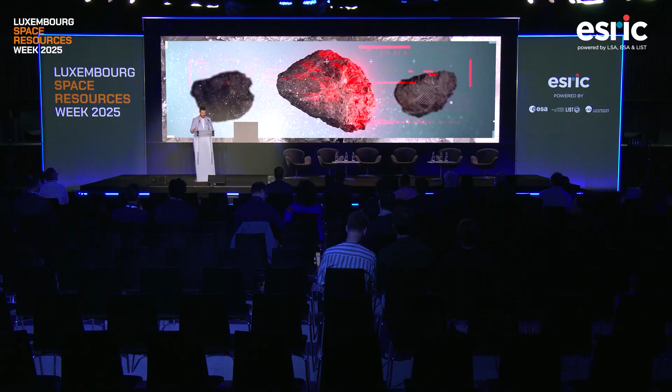Hello, good morning everyone. Thanks for making it that early in the morning. So I'm Timon Schild. I'm a PhD candidate here in Luxembourg at Esric, and I'm going to talk a bit about our work on the FFC molten salt electrolysis process, and specifically on the metal production aspect of this process.

So for a bit of context, some of you may be familiar with this. This is a diagram of the FFC process, which is used to extract oxygen from lunar regolith, or in our case, lunar regolith simulant. And as a byproduct, you also get all the metals that were present in your feedstock collected at the cathode.

What our project is looking at is taking those metallic byproducts and turning them into a feedstock that we could use for additive manufacturing. So in this talk, I'm going to talk about, first of all, the characteristics of this product, the investigations we did to look into the melting behavior of those for the casting and forming of those alloys, and finally a little sneak peek into some early results on laser interaction.

So to begin with, I'm going to do a very quick summary of my presentation from last year, which was all about the characterization of those materials. So what we did, we ran the FFC process at a lab scale on LHS1 regolith simulant. And when you do this, so you electrolyze it in calcium chloride, in our case for 24 hours, you end up with this kind of material.

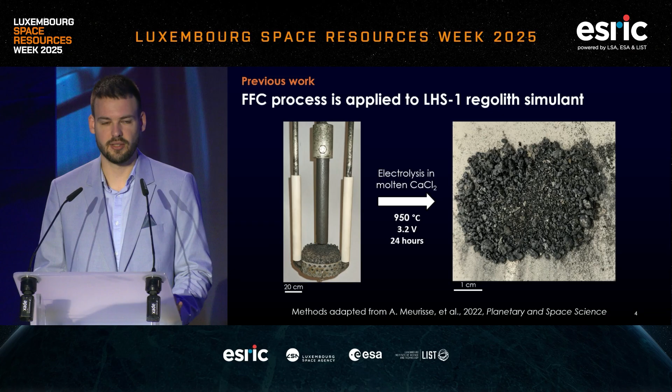A metallic powder or granulate that looks very heterogeneous as it is, and even more so if you take it under the microscope. So here you can see the abundance of all the different metallic phases that you have in there, all mixed together. I'm not going to go too much into details about that. We have a publication that came out earlier this year. I invite you to have a look at it, and afterwards I'm happy to discuss some parts of that.

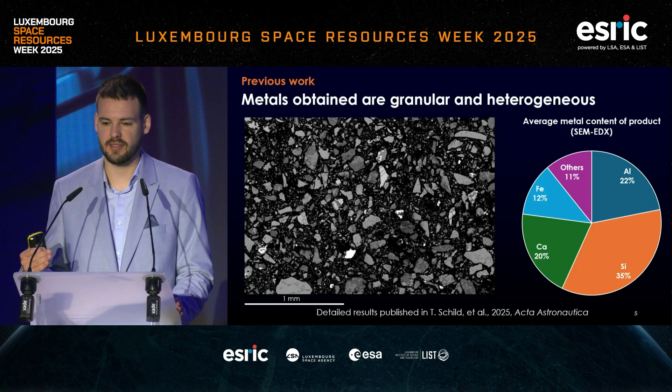The only thing I'm going to tell is the average bulk composition we observed in this material is, as you expect, most of the metals you put in come out. So you get mostly aluminum, silicon, calcium, and iron, as well as some contaminants from the process. So now I'm going to talk about what we've been doing during this current year. We have been looking at the thermal post-processing of this material and how we can turn it into an ingot or a billet that can be used for manufacturing.

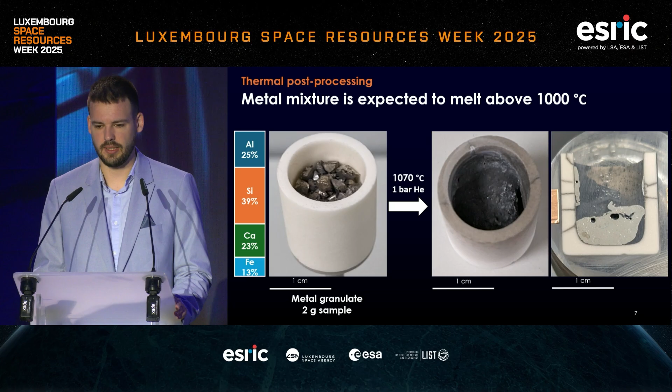So the first thing we did is we took off-the-shelf metal granulates and mixed them in the proportions that we observed in our product. So a mixture of aluminum, silicon, calcium, and iron, and applied different temperatures to it. And we observed that slightly above 1000 degrees C, when we heat it under inert atmosphere, we were able to produce this nicely molten ingot. Here you have a cross-section of it as well.

And when we look at it under SEM, we see isotropic distribution of metallic phases, no clear, let's say, vertical phase separation, and you also see complete consolidation. So it forms a nice melt pool and consolidates to a solid ingot. This is nice.

This is kind of what we were looking for to get from our products out of the FFC process, but when you apply similar post-processing to actual products coming out of the FFC process, things get a bit more complicated. Here, just for the composition, again, not many changes. We get out what we put in, so we don't have many losses. We do have a slight decrease in calcium, but that's also within the measurement margins.

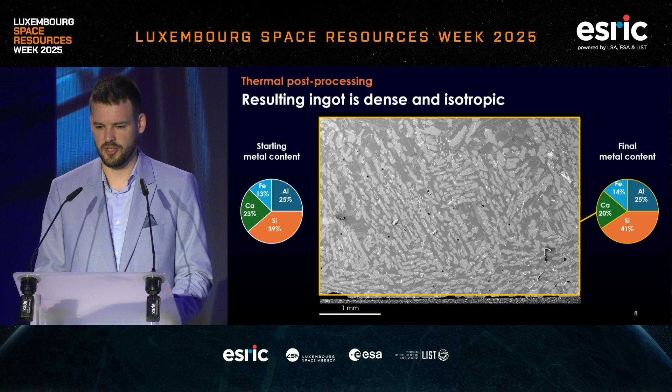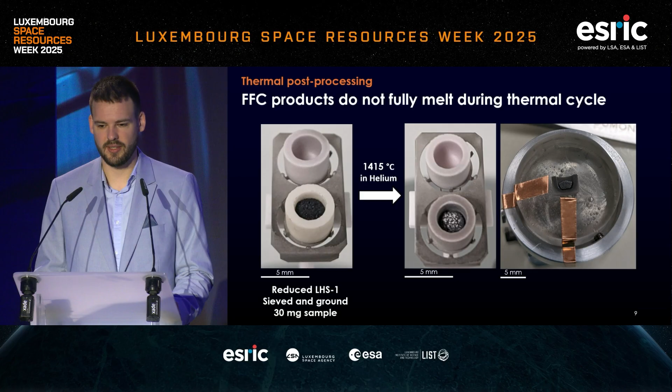So as I said, if we apply this to actual products that come out of the FFC process, here we took some reduced LHS1 and also applied different temperature profiles, but there we observed that even if you go all the way up to 1,415 degrees C, which is kind of the limit of our instrument, we do get consolidation, but what we can see is that we get more of a semi-molten, sintered ingot rather than nicely consolidated billet.

This is what it looks like under SEM. A few interesting features we can see there. First of all, we can see it's still quite porous, although it has partially molten in some places. And we can also see a vertical segregation. So we see a separate phase collecting at the bottom of the crucible there.

Compositionally, again on the left you have the starting composition that we measured in the material. A few interesting things in the bulk material in the red region: we see a significant decrease in calcium, which on one hand is explained by the pooling of a very calcium-rich phase at the bottom, but at the temperatures that I'm discussing here, we also expect some significant evaporation of the calcium. I'm not going to discuss the lower temperatures that we tried, but in a nutshell, the lower you go in temperature, the less and less it is consolidated.

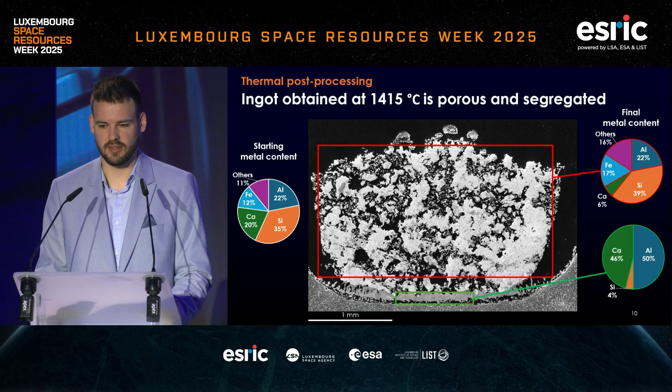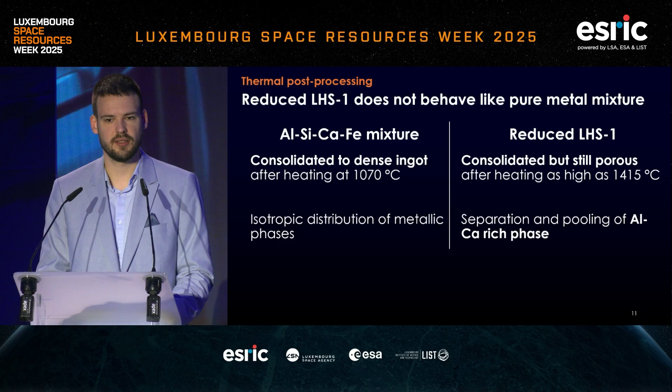So to summarize this part of the work, on the left we have the results with a kind of idealized mixture of aluminium, silicon, calcium, and iron, and on the right what we actually observed with reduced LHS1. We can see on one side we get, as expected, a nice melting and ingot formation, slightly above 1,000 degrees C, whereas with actual products from the FFC process, the consolidation happens, but not fully, and we don't have a nice melt pool formation, even as high as 1,400 degrees. We also observe a phase separation that we do not expect from the idealized mixture, where the phase distribution is isotropic.

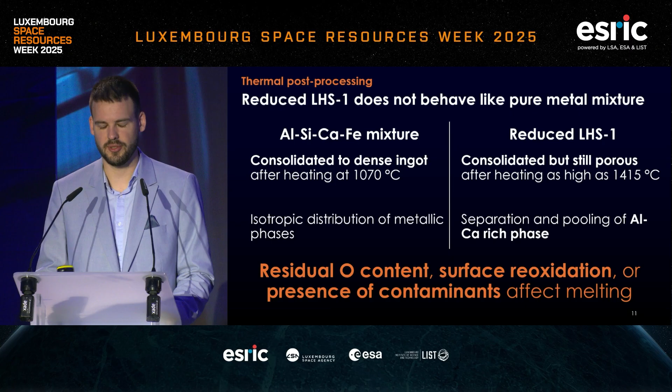So to conclude on that part of the talk, we expect that we have some elements present in the reduced regolith simulant that prevent the melting. Our main suspects, let's say, are the residual oxygen content. We still have over 1% oxygen in there, so 1 to 4 weight %. It could also be surface reoxidation during the post-processing, as well as the presence of different contaminants. I'm thinking stainless steel components from the reactor. So still some investigation to do there, but we still continued pushing forward in parallel, and we started looking at the end application, the additive manufacturing.

So here I'm going to talk a bit about Metal 3D, which is an additive manufacturing system built by Airbus Defence and Space, and that is currently on the ISS, 3D printing metallic parts. The way this process works, it's a wire laser-based process. So you have a substrate, in the flight model a stainless steel substrate, on which you impinge a laser beam that forms a melt pool, and then you feed some wire, in the flight model stainless steel wire, into it to form the parts that you can see here on the left.

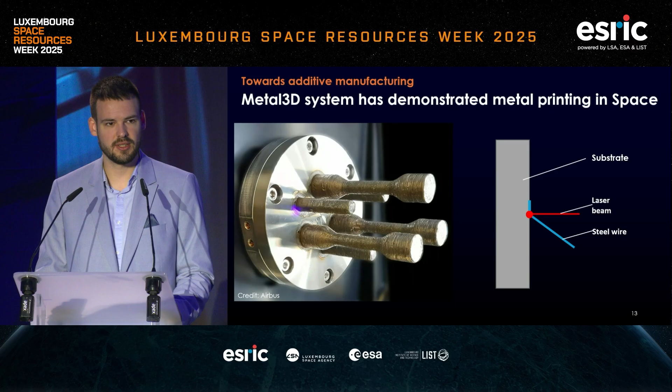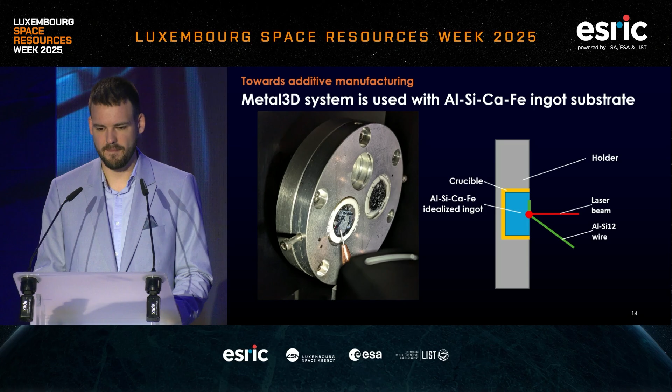So we have been using the engineering model, or a prototype of the same system, and we applied it to our idealized aluminum, silicon, calcium, iron mixtures. So we replaced the substrate by an ingot of our mixture, and we replaced the wire by an aluminum silicon wire, a commercial 12% silicon aluminum alloy. And so here I'm going to show the very early results from that. And I have a video of what this deposition process looks like.

So here we can see we're forming a melt pool and then slowly feeding the wire in it, and here it's just a first layer. The main thing to observe here is we get a very nice melting of the substrate and a very nice weld bead, in a way, deposited on it. If we look at the kind of samples we obtained, again, that's the first sample we got, so obviously there's room for improvement.

So on the left side of the sample, you can see single beads deposited. And then on the right-hand side, we tried stacking 2 layers on top of it. If we look at the section of this under SEM, that's what it looks like. And we can see 3 distinct regions. On the bottom, you have the substrate, which is very similar to the ingot I showed earlier.

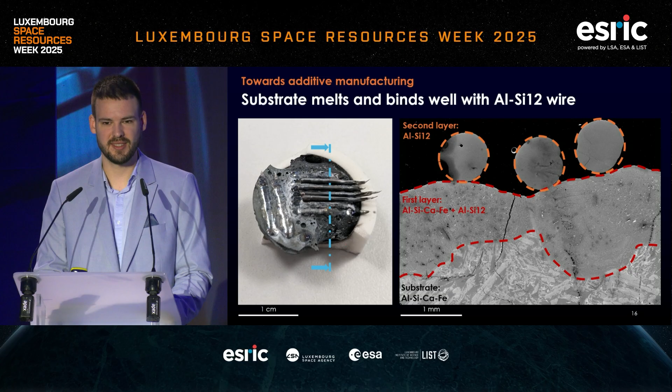And then the interesting part is the first layer is very well mixed between the aluminum alloy and the substrate with very good adherence and kind of mixing of the material. And when you look at the second layer, we can actually see that the metal wire we're depositing adheres less well to itself than it adheres to the substrate. So that's quite an interesting result for us, showing that the material does have potential for additive manufacturing.

So the 2 conclusions I'm taking from this work: first of all, the melting behavior of the metals that come directly out of the FFC process is not trivial and still needs some work. Our suspects, as I said, are residual oxygen content or contaminants from the process. But if we can solve this step, the metal ingots we are expecting to get at the end of this work actually should be quite suited to the wire laser-based additive manufacturing process, especially if we get a very nice melting behavior. I'm going to leave it with that.

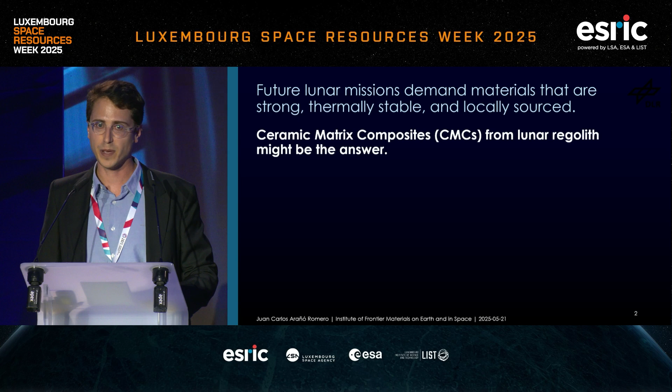So this talk covers five key points: why lunar regolith is relevant, what CMCs are, how we produce them, what we found, and then what this means for space exploration. So let's start with why lunar regolith could be such a promising material.

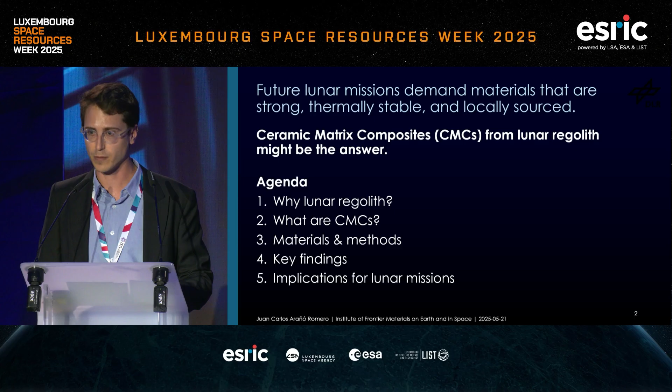So lunar regolith is rich in useful oxides, and they're readily available, so it's perfect for in situ resource utilization. And this table here compares the oxide composition of actual lunar samples with our raw material used during these experiments, the EAC-1. As you can see, it contains silicon oxide, aluminum oxide, and iron oxides in a comparable range, specifically closer to mare regolith.

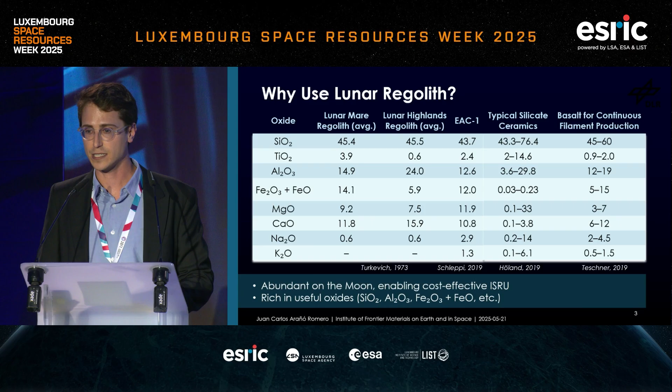And now we can see that typical silicate ceramics are also in a comparable range, the typical oxide composition, as well as the typical chemical composition for basalt used for continuous filament production here on Earth. So this makes lunar regolith suitable for producing the materials that we require for the CMC production, as well as its ready availability. So let's talk about what CMCs are and why they matter.

So CMCs are an advanced material designed to overcome the natural brittleness of ceramics. It's a combination of a ceramic matrix with a reinforcement phase. In the case of this study, I will talk about short fibers. So by adding fibers, we are using the reinforcement strategy of improving the crack resistance of the ceramic.

And this means that the material will be more efficient because we can produce components that require less mass, but have a comparable toughness and the same performance as another component with higher mass. So because of these properties, CMCs are usually used on Earth in demanding environments, especially for thermal protection, structural panels, and components that usually face extreme temperatures and loads.

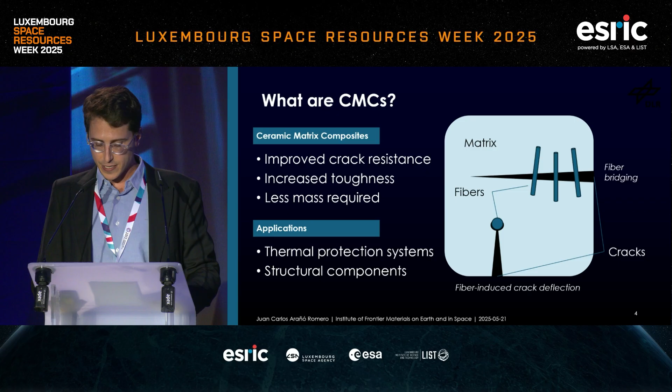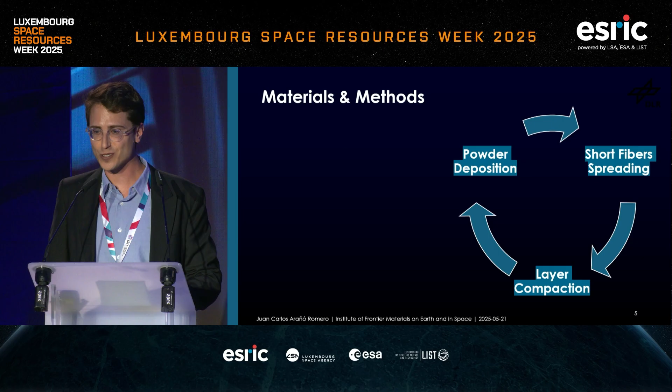So in our case, we wanted to make such composites. So let's take a look at our methods and materials. Okay. So as we already explained, our material is made of lunar regolith simulant, EAC, as well as short basaltic glass fibers that have been made from the same material.

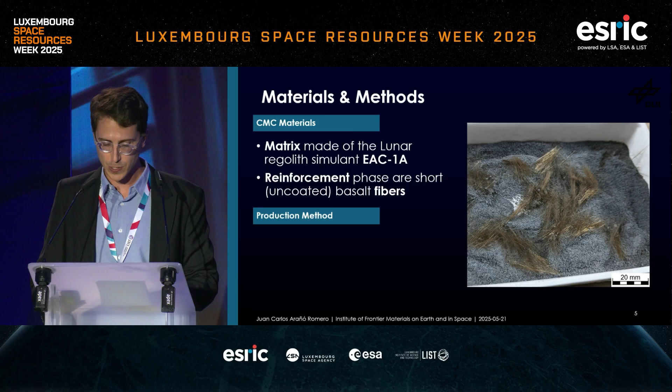So the diagram basically summarizes the process: we layer the powder, which was previously dried. Then we spread the fibers randomly over the powder layer, as I mentioned, and we compact each of the layers. Then we sinter the whole structure under different conditions, and with this setup, we produce multiple samples. So let's take a look at how they perform.

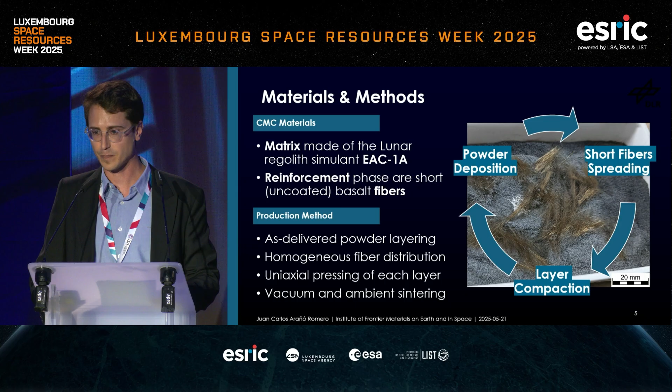So the mechanical results of our sintered samples will be described, and how the fiber reinforcements improve them. So first, with fibers, we saw improved performance. The samples tolerated more strain and reached a higher strength in comparison with the samples without fiber reinforcement. Interestingly, the holding time during the sintering, the thermal treatment, didn't have much effect on the performance across different particle sizes.

But higher sintering temperature clearly led to an improvement of the compressive strength, which could be due to the higher liquid phase. And there was also a significant strength gap depending on the particle size. Logically, as could be expected, finer particles gave better results because there was a higher surface area, and the particles could bond better. And we also examined the raw material under the microscope, and we saw that it actually has a smoother surface than real regolith, and that actually helps the densification of the sample during sintering.

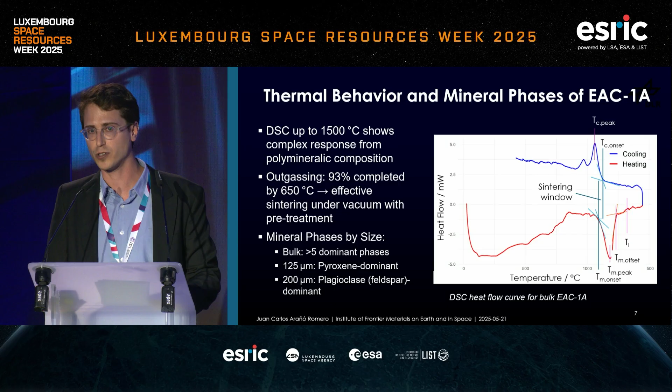Also, we ran some XRD, X-ray diffraction, in order to see the mineral phases in different particle fractions, and we saw that the bulk material has 5 dominant phases, but the finer fractions have mostly pyroxene and plagioclase. So this thermal result supports our mechanical findings, and we can show the potential for processing this material under space conditions.

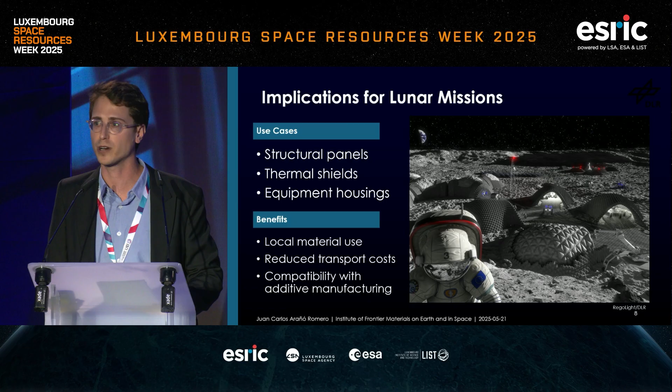So I don't have much time, so I'm just going to go really fast on the implications for the lunar missions. So basically, we are able to produce structural panels, as I discussed, thermal shields, as well as equipment housings for future lunar settlements. And the benefits are quite clear, that we can use the local material, we can reduce the transport costs, which will make it more economically viable, and it has compatibility with additive manufacturing, which is a project that we are currently working on, which is quite exciting, but we're not going to discuss it today. But you can ask me afterwards, of course.

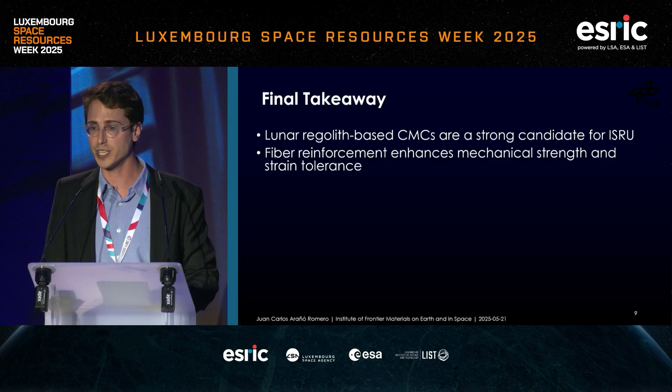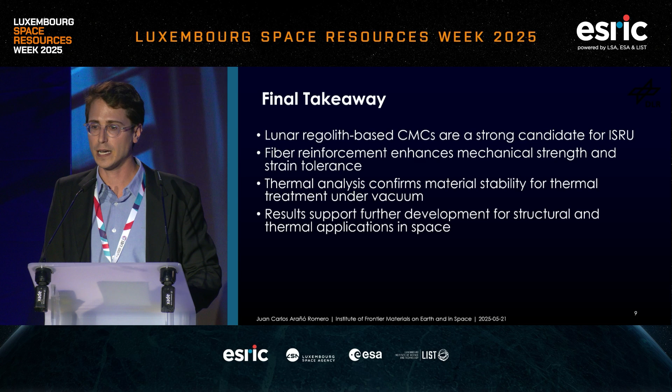And the final takeaways: the lunar regolith-based CMCs are working, fiber reinforcement actually works. So it improves the mechanical strength and the strain tolerance, and thermal analysis confirms some of the behavior of the material and gives a better understanding under vacuum. And yeah, these results support that we should further develop these technologies for future applications in space and on the moon. So thank you very much.

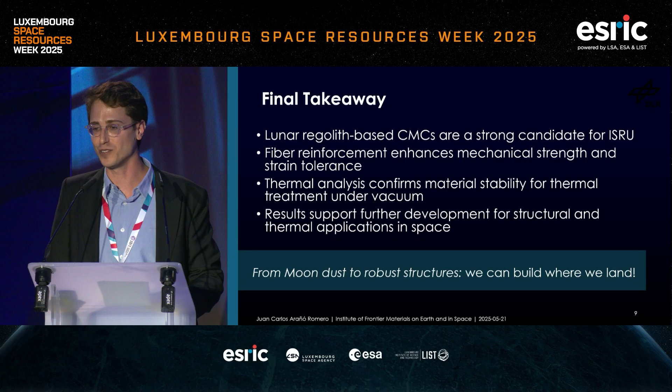I hope that we just wanted to say that we actually can build where we land, and moon dust is actually one of the materials to use. So thank you very much.

Thank you very much, Juan Carlos. I'm glad that you're talking about landing pads. I think Jerry's presentation showed that it was somewhat down on the list, but at least to me, that's an important aspect. So Jerry, first question.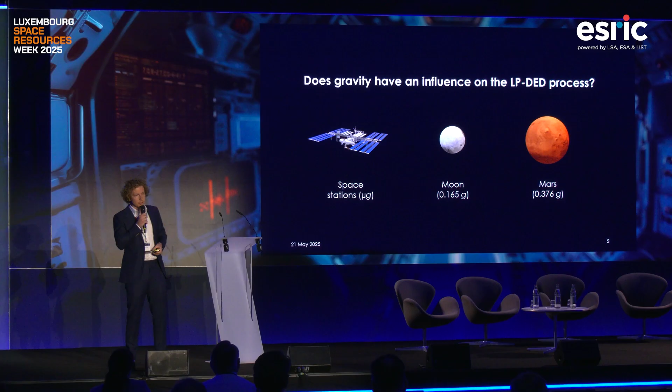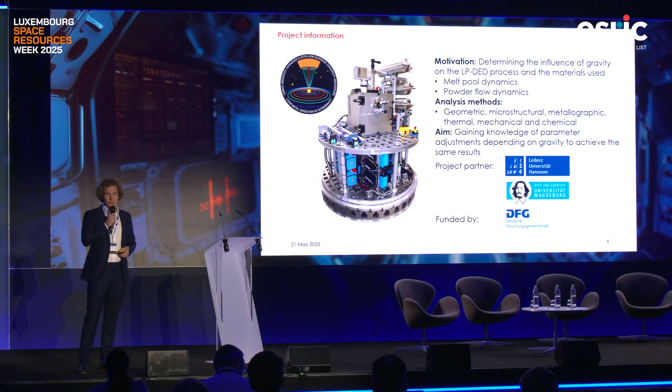So we're coming to the main question of my talk. Does gravity have an influence on laser powder directed energy deposition? For example, microgravity on space stations or lunar and Martian gravity. And that's the aim of our research project: determining the influence of gravity on the LPDED process and the materials used, especially the melt pool dynamics and powder flow dynamics. This project is a cooperation between the Leibniz University of Hannover, where I'm coming from, and the Otto von Guericke University of Magdeburg, and is funded by the DFG.

So how is microgravity simulated? That's important because we want to get to know the influence of gravity, so we're doing that at our drop tower facility located in Hannover, which is also part of the research infrastructure of the university. It's an active drop tower facility with a height of 40 meters, with a drive system over the whole length. There we have the opportunity to do everything between microgravity and up to 5G. For microgravity flights, we have a maximum of 4 seconds of microgravity with a residual acceleration of 10 to the power of -6 G.

And with the help of the drive system, we are able to do up to 300 flights in 24 hours. And we have a huge payload capacity with a carrier dimension of up to 1.7 meters in diameter and 2 meters in height and up to 1,000 kilograms. And we do offer third-party use, so if you are interested, feel free to contact us.

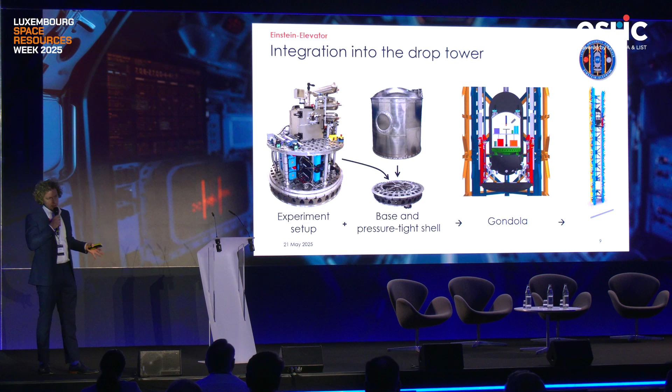That's the preparation. The experimental setup goes on top of our base structure, where several units are in, like the flight computer, heat exchanger systems, battery, and so on. Then we are able to put on a pressure-tight shell for acoustic decoupling, additional to the mechanical decoupling. Then the whole system goes into the gondola system, which you can see on the third picture, and then we are ready for flight. And that's how it looks.

So we accelerate the gondola with 5G for half a second, for the first 5 meters. And then the inner part, where the experiment is set up, will decouple from the bottom of the gondola, and we are in free flight. 2 seconds to the highest position, then it's falling again 2 seconds, so in sum 4 seconds of microgravity. And that's a small example, a bottle filled with water and a small amount of air. In microgravity, the air is forming a perfectly formed sphere.

So, in my case, the clicker is not working. Come on.

Okay, so how are the specimens manufactured in microgravity? This is a setup you have already seen with several units, like the control system. We have a cooling system for cooling down the laser system, the fiber, the nozzle, and the optics. And then a diode laser with a maximum power of 2000 watt. The diode laser has its own energy storage.

We have a manipulator on board so we do not have to open the process chamber and the gondola every time we have manufactured a specimen. Then the process chamber for not contaminating the environment and for having a shielding gas atmosphere, a powder conveyor, and the pneumatic system, which is part of the powder conveyor.

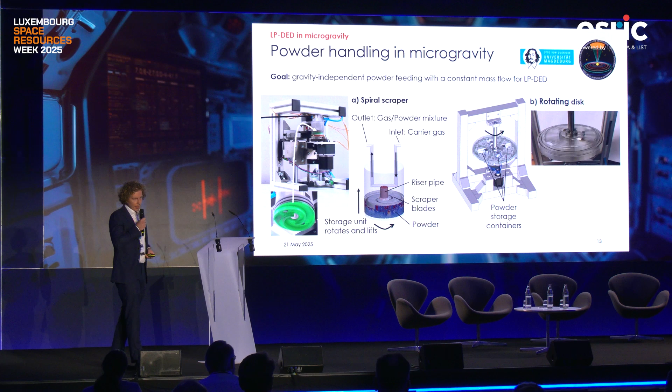And the second prototype is a rotating disc, where we are having up to 4 powder containers. And then we are rotating the disc. The particles are going to the outer part. We have again some argon tubes catching the powder. The mixture is going back into the center and to the outlet. And that's how it looks if we are rotating this. We are using the spiral scraper for our first flight campaign. And that's how it looks.

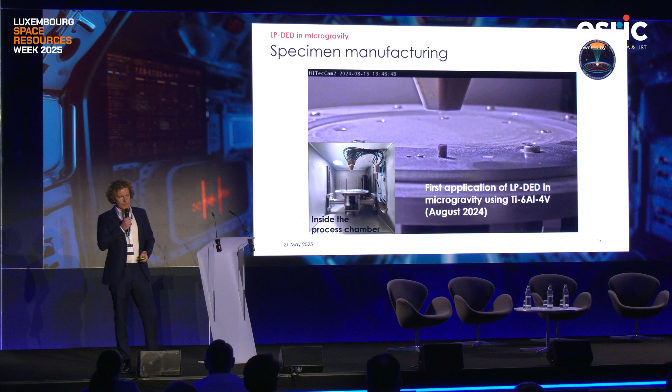So this is a worldwide first application of laser powder directed energy deposition in microgravity, in this case with titanium 6-4. And you can see that we are only able to print a small section with a small height of the specimen, but we can do several flights to increase the height of the specimen. So the question is, can laser powder directed energy deposition be used in in-space manufacturing? And the answer is, like you have seen, yes, we can.

We have done some Vickers hardness tests, and there we have seen a higher hardness value in all the 7 measuring positions. For this we have 2 reasons. The first one is that the powder mass flow increases due to the powder feeder working in free fall. So the volume of the specimen is a little bit higher. We're working on that, but it could be, reason 2, that there are different melt pool dynamics, because in microgravity there's only the Marangoni flow and no buoyancy flow.

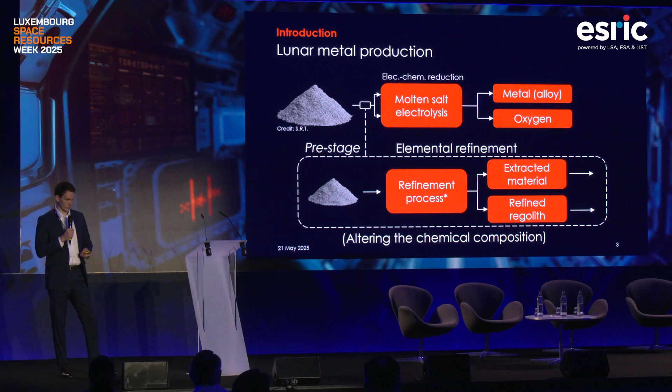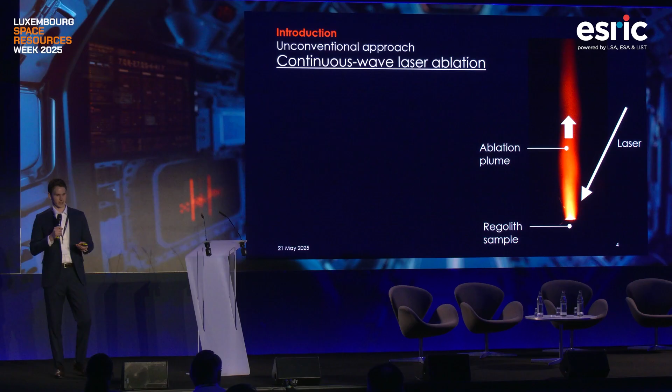And so the idea is to put the raw regolith through this refinement process, really extract some materials on the elemental level, so alter the chemical composition, and then end up with, for example, 2 separate feedstocks that we can individually feed into an electrolysis reactor to produce higher purity metal alloys. And the approach that we take is rather unconventional. We propose the use of continuous wave laser ablation at atmospheric pressure. The idea is to simply irradiate a laser continuously onto the regolith. We deposit lots of energy inside the regolith, and it ejects an ablation plume that consists not only of vapor, but also of reduced species, because CW laser ablation covers the boiling area, but just as well goes into pyrolysis, so into decomposition and reduction.

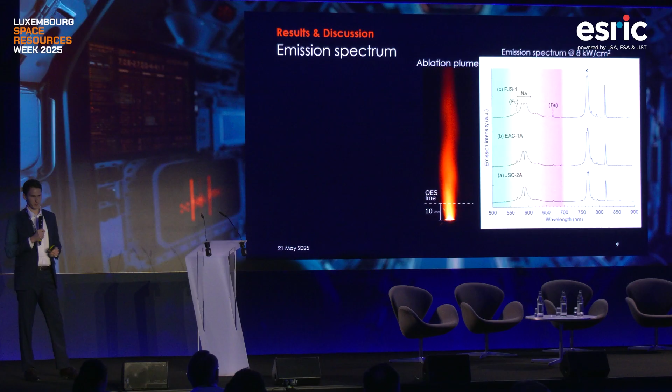So naturally, we would assume that at least these species are somehow present in this plume that we see in the pictures. And we do see that partly in the emission spectrum that we measured 10 millimeters above the surface. We see mostly sodium and potassium strongly radiating in this spectrum, and also lots of smaller peaks that were not all identified, some of which we believe to be iron. Most importantly, potassium and sodium match with the boiling points, and moreover, they are obviously thermally reduced if they were present as an oxide before.

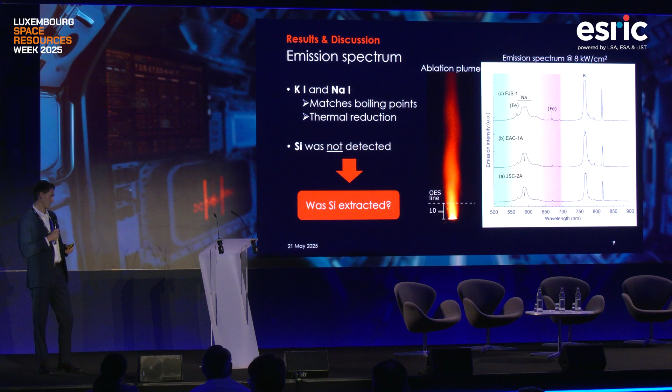And that already concludes my talk. We were able to extract oxides, we believe, though we have not performed XRD to confirm yet; we're on the way. Silicon dioxide, sodium oxide, potassium oxide. It seems that the boiling points of these oxides align very well with the surface temperature that we got. So we believe that we can actually refine regolith based on the boiling points of these oxides to a certain extent, meaning that refining regolith through laser ablation is feasible, something we should look further into, with prospects that we can combine certain methods to produce higher purity metal alloys.

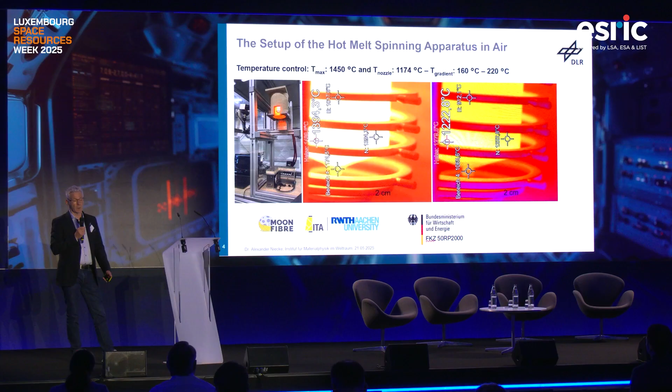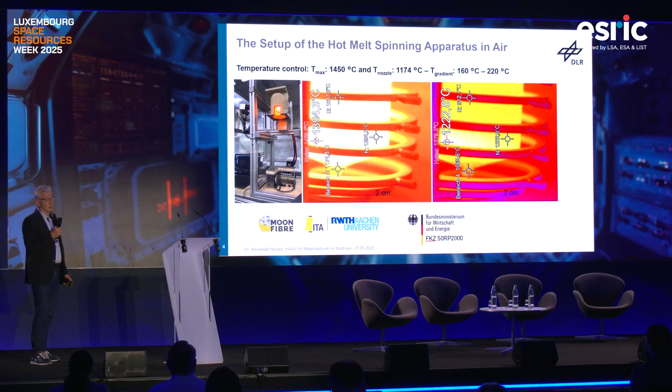So the conceptual sketch that you have seen was now realized as a demonstrator and a lab-scaled furnace, and it consists of a winder again, the inductor, and a housing system around the inductor and the coil. And it can be noticed that the temperatures are quite high in this inductor. We can run this system at 1450 degrees C, and you can also see on this slide that the temperature gradients are quite big. This is due to this system.

So our next step will be to incorporate these parts of this apparatus into a vacuum box or vacuum chamber in order to reduce the spinning temperatures and optimize the spinning process later on.

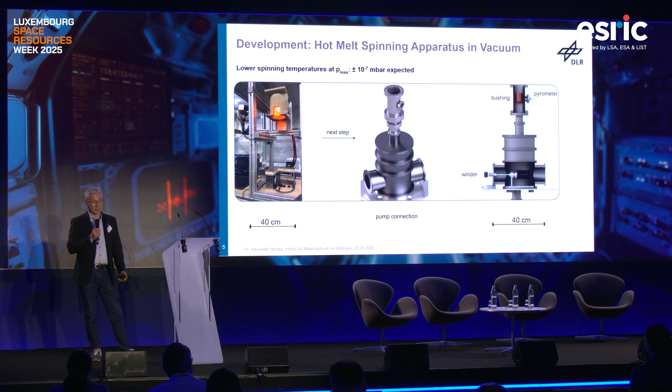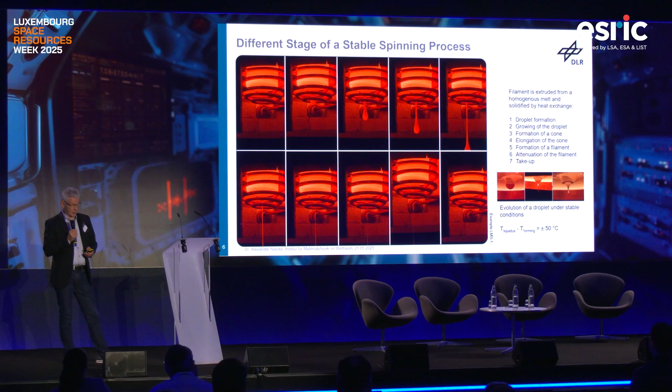To assess if this system is really working, there is a simple formula to calculate the forming gap or the temperature range in which this process might be stable. That means you have to determine the forming temperature based on the viscosity, depending on the chemistry, and the liquidus temperature. And this forming gap should be more or less 50 degrees C. The higher, the better, but 50 degrees C is already a good temperature.

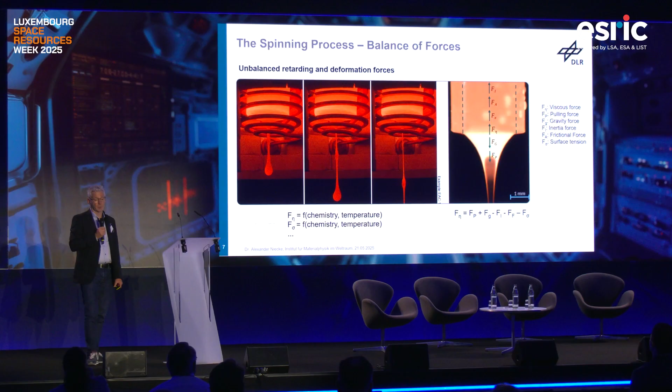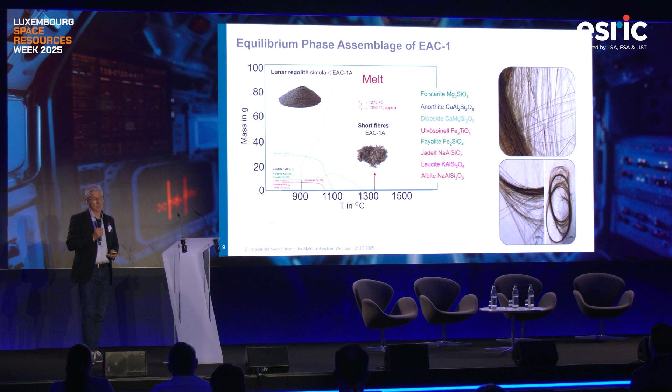We produced several grams, but this material has some inconsistencies, so that endless fibers of textile quality were not possible in large quantities. In contrast, we modified the EAC1 composition and were able to produce endless fibers of textile quality with high E modulus and relatively high tensile strengths.

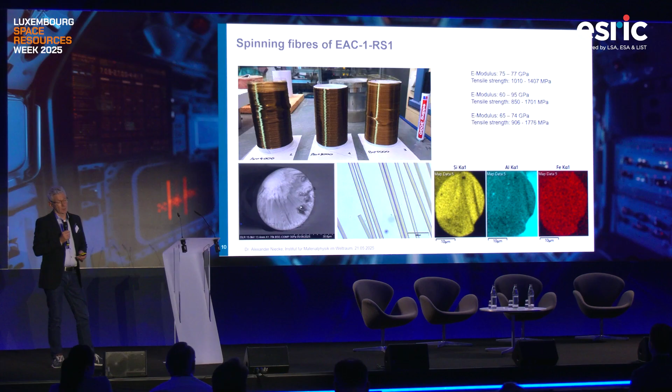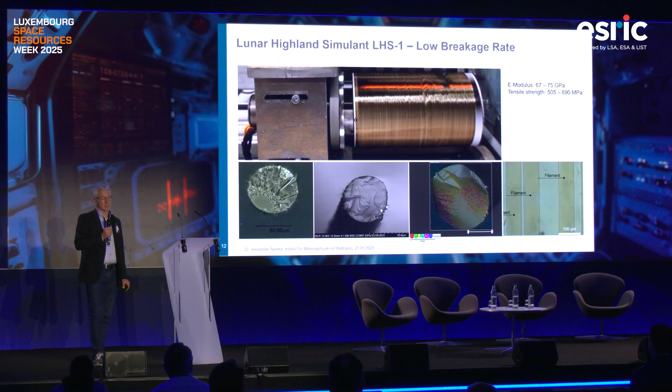The same for the LHS1. For this simulant, much more elevated temperature was needed because the liquidus temperature and the forming temperature are quite close. But nevertheless, we were able, by modifying the setup of our experiment, to produce also in bigger quantities, textile-grade quality, endless fibers.

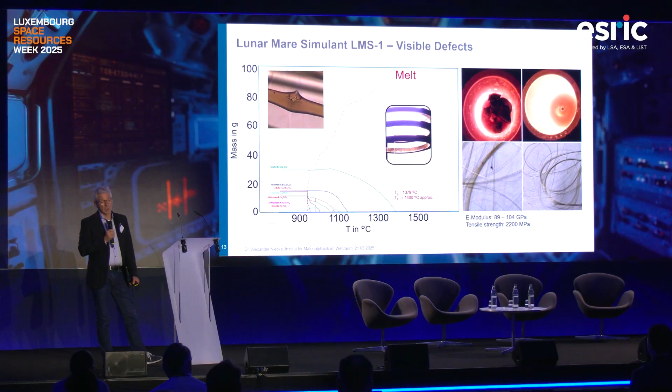LMS1 was also possible to be produced. You see more in detail these imperfections, and you also see that macroscopically you see imperfections, and also on the microscopic scale using light microscopy, imperfections and inclusions are visible, and these inclusions have a detrimental effect on the spinability.

So conclusions are that the continuous fibers are indispensable for structural and construction materials. Processing continuous fibers using simulants was possible. All simulants were fiberizable, however thermal parameters are unique for each simulant. More investigations of the glass forming ability are necessary to better understand the spinability and how to optimize the mechanical properties. Current experimental setup will be adapted for spinning in vacuum and therefore lowering the spinning temperatures.

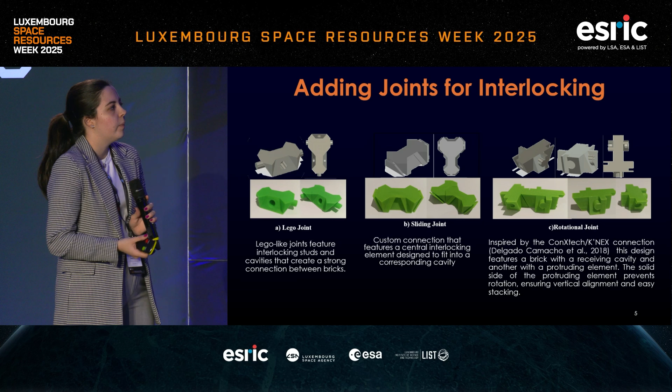We also looked at the sliding joint to be able to have something more easily assembled with robots, because the Lego joints ask for really precise positioning with robots. And finally, we looked at something we called rotational joints. So it's something that kind of mixes the 2 previous ideas, the sliding joint and the Lego joint, where we kind of rotate the brick to fit into each other. These joints are really stable, but really difficult to obtain in robotic assembly because they ask for 2 different movements.

So we still wanted to know if these properties of misplaced bricks and a stable habitat were still possible when we added a joint. So we did some simulation to learn how they act when we added joints. What we learned: with the Lego joint and the rotational joint, we have a lot more stress and a lot more displacement than with the sliding joint. So with the Lego joint and the rotational joint, if they are misplaced, the whole habitat will not be aligned as it should, while the sliding joint still keeps its property to be really aligned and self-adjusting.

So now we started to work on a more global and larger assembly. So we started to look at the dome and habitat. Our habitat, we are considering that it's going to be buried. So it has this kind of eggshell, half-spherical shape. It's going to be composed of 3 different curves that are going to be able to assemble together with panels. Until now, we are really working only with the Lego joint. We are starting to also look at how the other joints will work in the whole habitat.

So we have also been working on another idea for interlocking. We also wanted, outside of the habitat, to have something easy to do with tunnels, cables, and things like that. So we developed this kind of pipe. We have a larger diameter and a smaller diameter, and the corrugation works as the interlocking joint. So they are able to slide into each other and screw to kind of an infinite level to be able to have this kind of transportation and things like that.

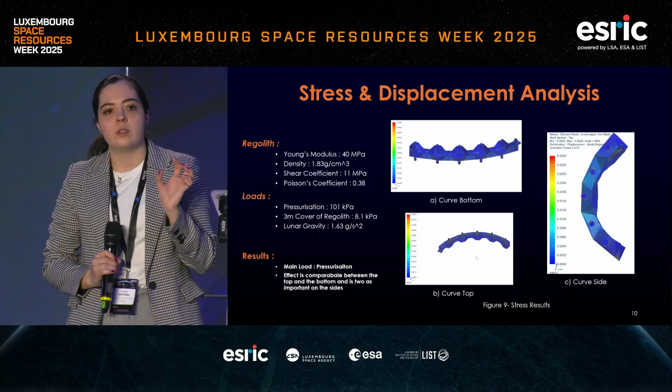The only question is we are not sure right now if we're going to add more internal layers for infiltration to not have to pressurize the whole habitat, or only this internal layer. So it's something we are working on right now, and we hope to have more information by the end of the summer on how we're going to work with that type of pressurization.